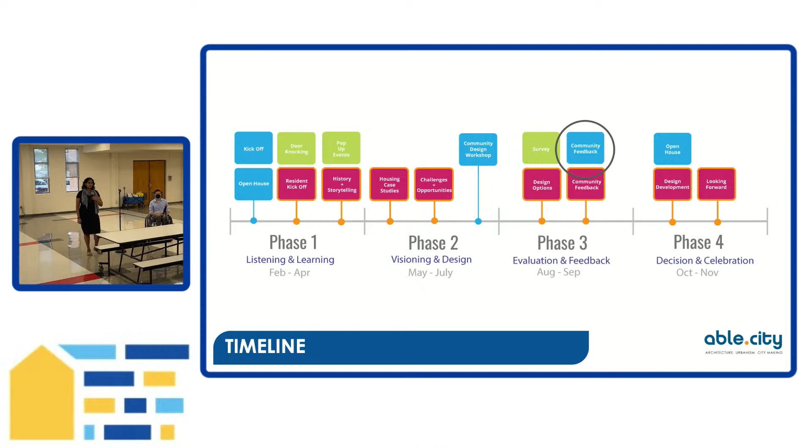So here's a little bit of the timeline of where we've been. We started this process in February, with a lot of learning and listening. We went out to community events, went door to door at Alazan, hosted a series of resident and community committee meetings, really just to understand what the community wants, what the residents want, what are the issues, what are the needs, what are the best ways to engage folks. And then we moved into design and visioning.

So we started to think about, well, what are the priorities? What should this master plan be defined by? And then we took a little bit of a break over the summer and came up with some initial proposals. So now we're in that evaluation and feedback phase.

So we're going to ask you all to take a look at the proposals. We have some questions about the master plan that we need your feedback on. Then we'll move into the final master plan version, and in phase 4, come to that final decision and hopefully celebrate together that we've come to an end result we're all happy with, and that you're excited about how we're going to move the master plan into the future.

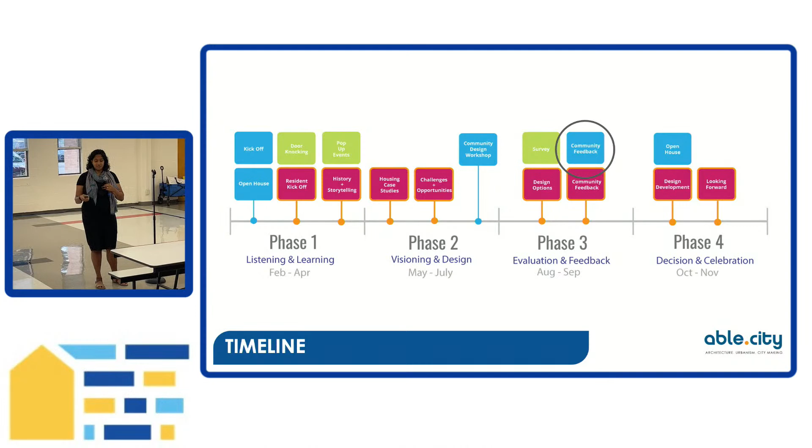Instead of other schemes, other past projects considered the possibility of mixing incomes, changing the rents at which people could live here. That was scrapped, and we're really focusing on maintaining Alazan as public housing, so that the income mix and the rental rates will stay the same. It will serve the same population as Alazan Courts serves today.

Another commitment was that we're going to retain at least 501 units. So Alazan is going to serve the same number of people as it does today, and all of those 501 units will stay public housing. The third commitment is that there's going to be no displacement from the neighborhood.

Over time, when we get into construction, there's probably going to be a need for people to be temporarily relocated, whether we're doing new construction or rehabilitation of existing buildings. People most likely won't be able to live through that in their units, but we're going to work out a phasing system so people can be relocated to other Opportunity Home units and homes on the near west side. It won't be dispersed across the city, but focused on a phasing plan where people can stay in their community, and then be invited back once the new project is complete.

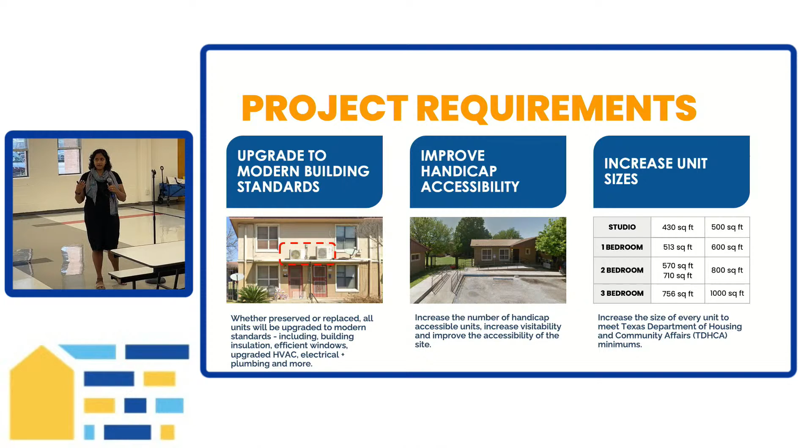And then the other thing we need to do is increase the unit sizes. Currently, the units are about 30% smaller than is typical today. So it's another regulation that we need to upgrade and increase the unit sizes, so that a 430 square foot studio needs to turn into a 500 square foot studio. So that's something that's going to shape the design development. It will shape how we can reuse existing buildings and what we need to do building new buildings.

Some of the design challenges: one is the floodplain. We're right up against Alazan Creek. With climate change and changing development patterns throughout the city, FEMA, the Federal Emergency Management Agency, is currently redrawing their maps, and that line of where the 100-year floodplain is will move. Currently, under all of the existing regulations, we're not allowed to build or do any substantial renovation within that area. So we need to plan for potentially the buildings that exist in that area most likely getting demolished, and we'll have to shift those units elsewhere in Alazan Courts.

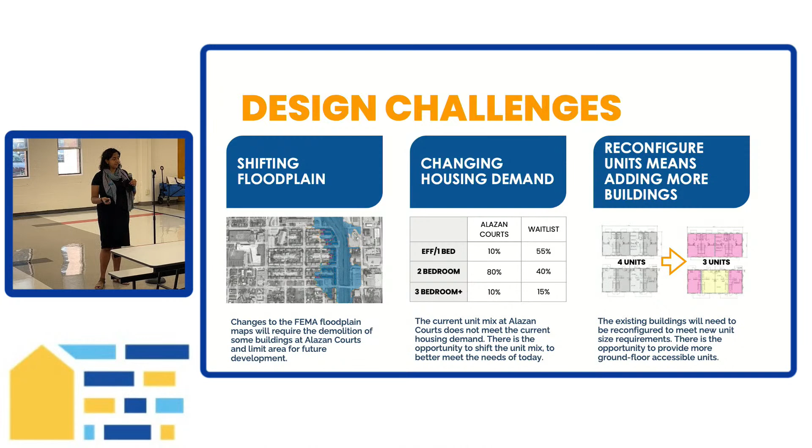So to dig into a little bit of that question of housing need - and I apologize if this is a little small, I can explain in more detail. Currently at Alazan Courts, there is a majority of 2-bedroom units; 82% of the units at Alazan Courts are 2 bedrooms, and that really defines the character of the neighborhood. It's a lot of smaller families, there are a lot of young kids at Alazan Courts, and that's really defined by the fact that the unit size, there's not a lot of those smaller units, there's not a lot of the bigger units, and so Alazan Courts is defined by that today.

And then you can see in the second graph, that pink bar is Opportunity Homes' wait list. Currently there's a high demand for those smaller units, and there's also a greater demand for 3-bedroom units and 4 or 5-bedroom units. So initially, when we started the design, we needed to find a starting place, and we said, why don't we try to find a balance between what Alazan Courts has today and what the need is in the city, so that we're responding to the current needs and not what the needs were in 1939. So for the starting point for our design options, we decided to move forward with increasing the number of 1-bedrooms, decreasing the number of 2-bedrooms, and kind of keeping the 3 bedrooms the same. In our initial feedback from last week, when we met with our committees, I think there was concern about that.

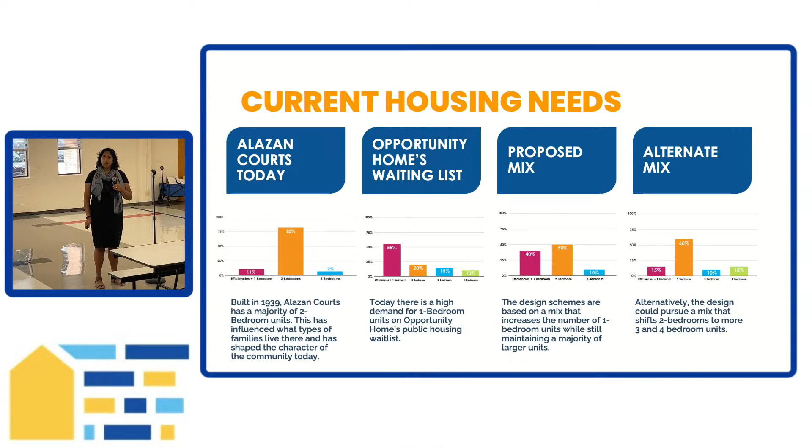So those are kind of the overarching things we're thinking about with the design. Thinking about those things, we started looking at the actual buildings, looking at the site. We had a goal of developing 4 different design options. So when thinking about that design, we needed to solve for this kind of challenge.

We had those 501 units. There's some units that are in the floodplain, so we need to accommodate for the fact that we're going to need to relocate those units. And then the units we had to reconfigure and make bigger, we lost some units there.

So of those 501 units of the existing Alazan Courts, in the future those buildings could accommodate 337 new units. Those new units are bigger and they're not in the floodplain. So of the existing buildings that we have, that's how many units we'd be able to maintain.

So that means to get back to that 501 number, we would need to add back 240 units. This was something that the folks who were here at the last meeting on June 25th played with in the Lego exercise.

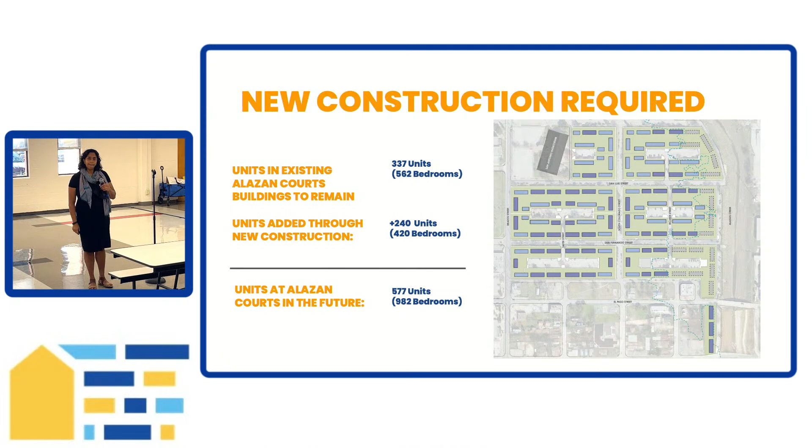Graciela: So you talked about 501 units and now it's 337 — so the difference is all of those that are in the floodplain? Speaker: The difference is the units that are in the floodplain, and the units we lost because we reconfigured.

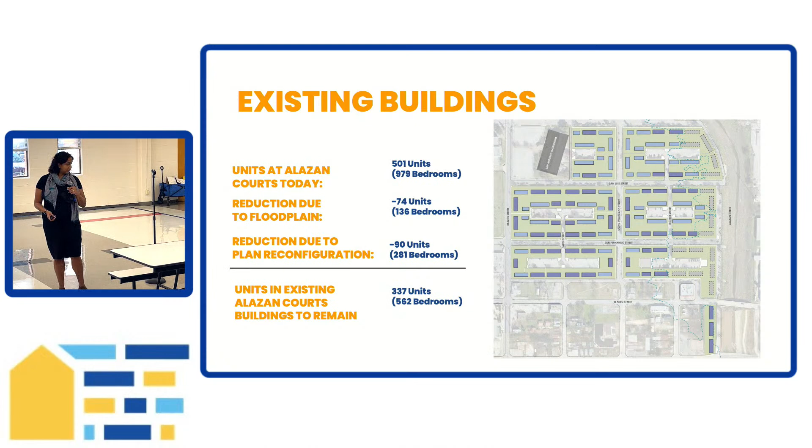So in the last one, we lost 74 units because of the floodplain, and then we lost 90 units because we had to reconfigure and make the units in the existing buildings bigger. But then the next question is — let's go to the next slide.

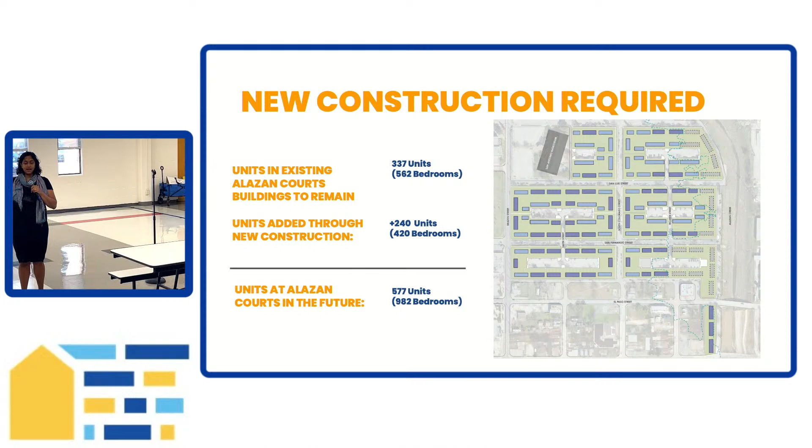So now we're going from 562 bedrooms to 982? Almost doubling? Yeah, so 501 units at Alazan Courts today has 979 bedrooms. We said in the final design, we want to make sure that there are 979 bedrooms.

At the mix that we used for the design options, we would need 577 units to achieve that. If we decide on a different mix, with more 3-bedrooms, more 4-bedrooms, we wouldn't need as many units because we would still be matching what's there today. So it's all this complicated puzzle of everything shifting up and down.

So none of those things are set in stone, and we really need your feedback to determine what the best solution is. Did I lose anyone on that? Are there any questions? We will get into small group discussions and can dig into some of these concepts in a little more detail.

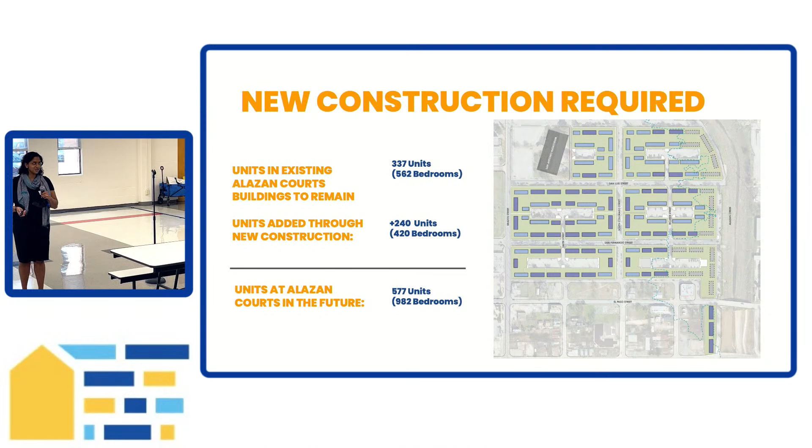Can I just add a comment on that? Mm-hmm. So even if the mix...

I'll let you pull it out. That is hard. Hello? Turn it on.

So even if the mix changes, even drastically, the problem of we've got to find more land for these units that we're losing is still in play, and it's still significant. So if we build a bunch of 4-bedrooms, this number is going to decrease by some percentage, but it's not enough for us not to have this design problem to achieve today. So that's where we're just starting from that number, but it's still the same exercise. It's still very valuable to us.

Go ahead. No, oh, sorry. Yeah, sure. I think there's also a question from Leticia. So on the point of relocation assistance.

When this project happens, the date that you're going to begin the project, you stated you're going to give the residents vouchers for relocation assistance. I have two questions. What accountability will the Opportunity Home case handlers have to make sure that these vouchers are designated for Alazan residents, or are they going to be utilized by other agencies like NHSD or other agencies in San Antonio to help with Opportunity Home relocation on other units? That's my one question. But also, what are you going to do when you give these vouchers to the Alazan residents? Because currently, anyone anywhere on Opportunity Home vouchers cannot find another place to go. I do work for a nonprofit agency in evictions, and it's a struggle to try to find relocation housing with a voucher. So are you taking that into consideration? And what are you going to do when they cannot find housing by the deadline when you start your project?

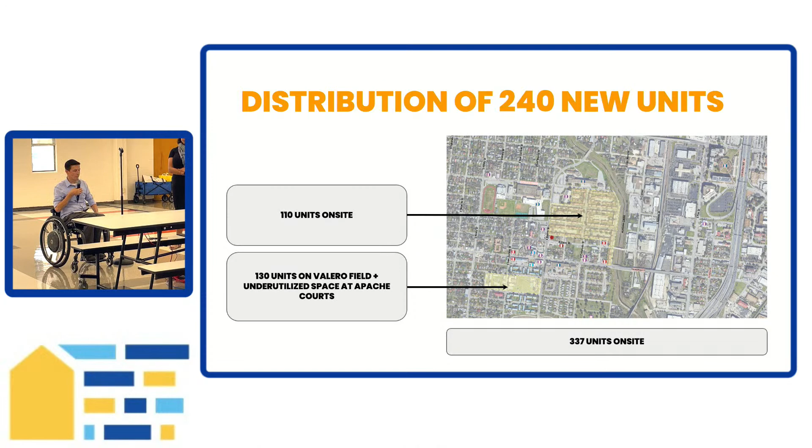So if we were to add proposed housing on the Apache baseball field, and we were to put all 240 units there, it would be a massive housing structure, and we don't want to do that. We want to do something that's sensitive to the local context and neighborhood, and sensitive to the existing housing that's at Apache Courts. So we can fit 130 units there by doing 2-story buildings in the same scale of the existing Apache buildings along the street, and infilling the existing baseball field area with some 3-story buildings tucked back behind those buildings with additional green space in order to get 130 units there.

We can definitely look at shifting that number down and around. That's one of the survey questions - how tall can those buildings at Apache be? If they need to be all 2-story, then we can certainly take that input and feedback and shift this scheme to be in response to that. But it begins to shift the numbers around again. If we go down to 2 stories there, then we have to look at where that additional number of units will have to go. So this was just our first iteration at trying to fit those units onto Apache to create some new housing there as we go through that first phase of the project.

Coming out of the committee meetings and the last community workshop, we started by looking at the different ways we'd gotten feedback about how to distribute green space back into Alazan and how to add units back into Alazan. There were a lot of ideas about putting new homes on the interiors of each block, along Brazos Street, or even along the existing floodplain line, hugging that line and adding additional homes there.

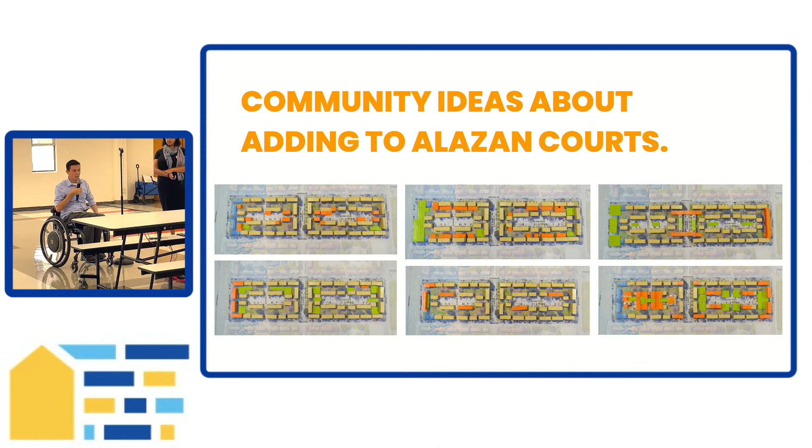This first scheme we call Maintain the Streets, because it tries its hardest to preserve the existing feel and neighborhood by keeping all the existing street-facing buildings. From an urban design standpoint, it's that front porch to street condition that really provides the existing look and feel of the Alazan neighborhood. So in this scheme we've tried to keep all the existing 2-story buildings that face the street, and we're only adding new construction to the interiors of the blocks within the footprint of the existing 1-story buildings.

By taking those buildings taller, we're able to get in some additional units and get us closer to the 110 units we need to put back into Alazan. By maintaining the streets, we're also able to distribute additional green spaces within the interiors of the blocks themselves. Then in each scheme, this purple box represents a placeholder for some form of community hub - an element that helps anchor additional green space along a park near the creek.

So in this scheme, even though we're only doing additional construction on the interiors of the blocks, in order to get back to 110 units, which is the goal, we had to add some additional height. In this scheme, we had to get to 3 stories.

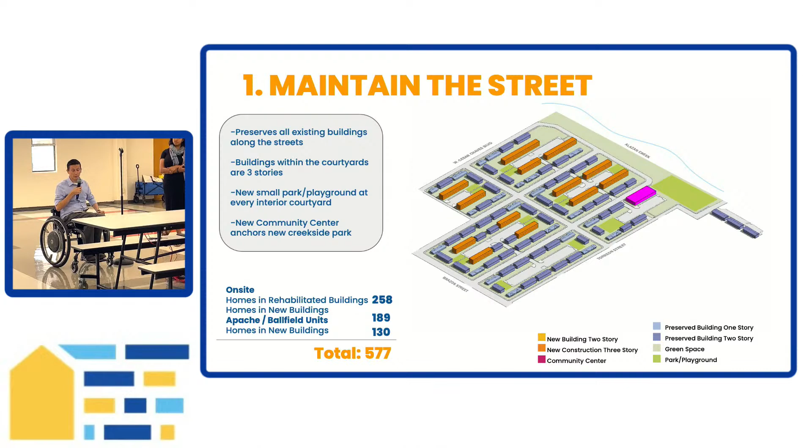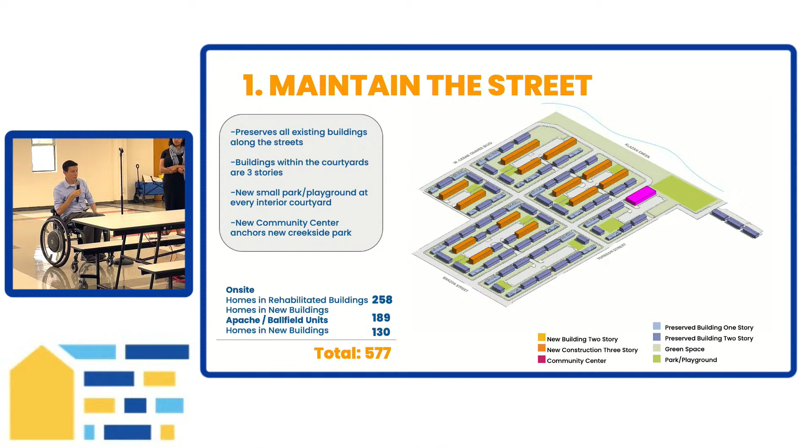I know we heard a lot of comments in the last community workshop that within the neighborhood plan, construction over 2 stories is not within that plan. So we wanted to be very sensitive with where and how we add any additional building height. We've already begun doing sightline studies of how those 3-story buildings would look and feel from the street. In this scheme, given that those 3-story buildings are added into the footprint of the existing 1-story buildings, they're set far enough back from the street and shielded by the existing 2-story buildings that you really don't see them or feel them from the street.

We've heard some comments and gotten feedback about additional view corridors at Alazan - from streets to downtown and from the courts to the creek. We can continue to look at those sightline studies if those questions arise, as we begin to look at any place where we might have to add additional building height.

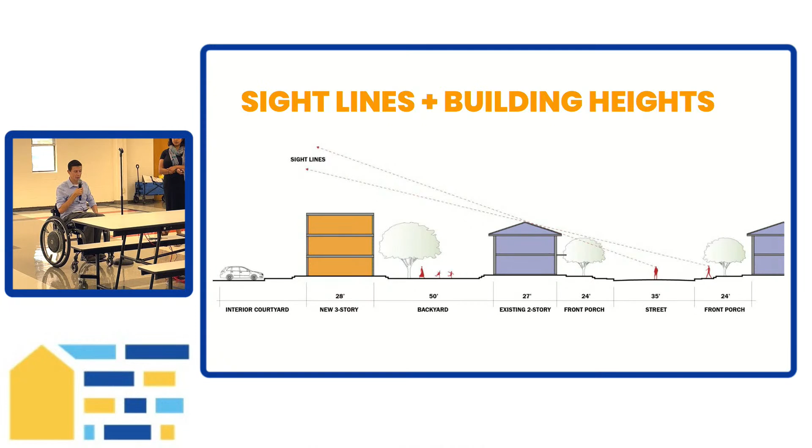In the second scheme, which we call Preserve the Core, we asked: what if we only did new construction at the edges? What if we only put new buildings along Brazos or along the creek itself, hugging that existing floodplain line? If we did that, we could preserve all the existing buildings within what we call the core of the neighborhood - along the streets and within the interior of the courts - while maintaining a 2-story building height along Brazos.

In this scheme, we're also showing the community element tucked under on the 1st story there along Brazos. That puts it in a really accessible and visible location.

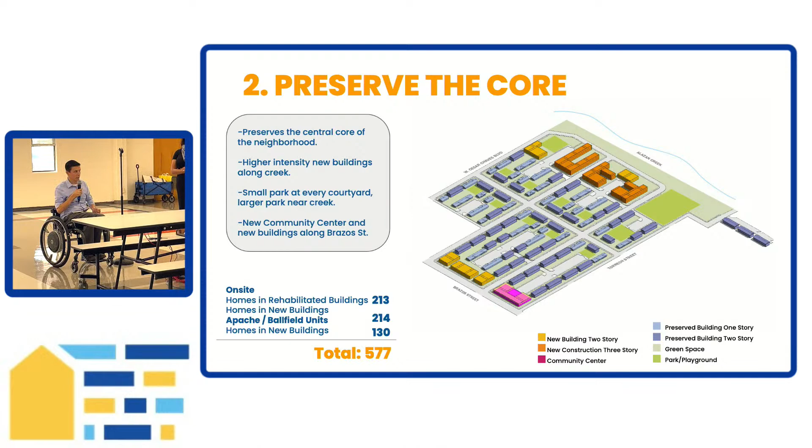By not touching the core of the courts itself, we're able to distribute a wider variety of activated green spaces into the corners of the existing blocks. In this scheme, because we're only touching the edges, to get back to 110 units, we had to go to 3 stories somewhere. We decided to push that back along the creek, tucking it away from neighborhood views and farther toward the creek. We're also anchoring a neighborhood scale park space back along the existing creek, where we're losing some units to the floodplain.

So we had scheme 1, where we looked at new construction on the interior of the blocks but had to go to 3 stories, and scheme 2, where we looked at building on the edges but again had to go to 3 stories. We really wanted to respond to that comment about building height and maintaining a 2-story building so we can help keep that neighborhood character.

So we said, what if we combine those 2 schemes in some ways, doing a little editing on the streets and near the creek, but also adding some buildings onto the interiors of the courts. By doing a bit of both schemes, we were able to bring the building height back down to 2 stories. In addition, by adding a few extra buildings, we were actually able to respond to one of the community values of adding additional public housing units. In this scheme, we get 23 additional housing units.

In this scheme, you can see how we've incorporated that community hub back toward the creek along a smaller scale neighborhood park, with additional green spaces distributed throughout the remaining blocks. The other positive of this scheme is we're able to maintain as many of the street-facing buildings as possible.

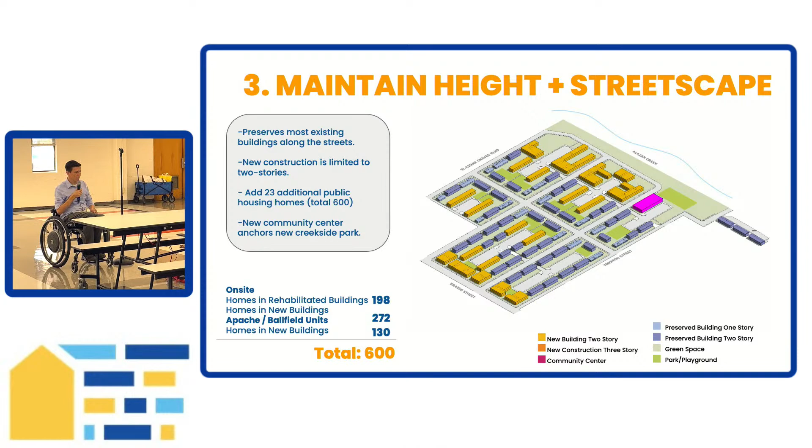In this last scheme, we really wanted to respond to one of the bigger community feedback elements we've heard: the need for more green space, a desire for places for people to spend time with their kids and families outside. This really rethinks the space along the creek and floodplain, looking at how we can incorporate as much new green space as possible. By doing some taller buildings along just Brazos, and some taller buildings within the interiors of the courts while rotating those buildings around, we were able to create a larger scale green space court within each block. Then, by pulling the buildings away from the creek itself, we could turn that into a neighborhood size park space anchored by a community hub.

So there you can see how those buildings along Brazos are a little taller, and the buildings in the interiors of the courts are a little taller too, but the benefit is that we can incorporate much bigger scale green spaces.

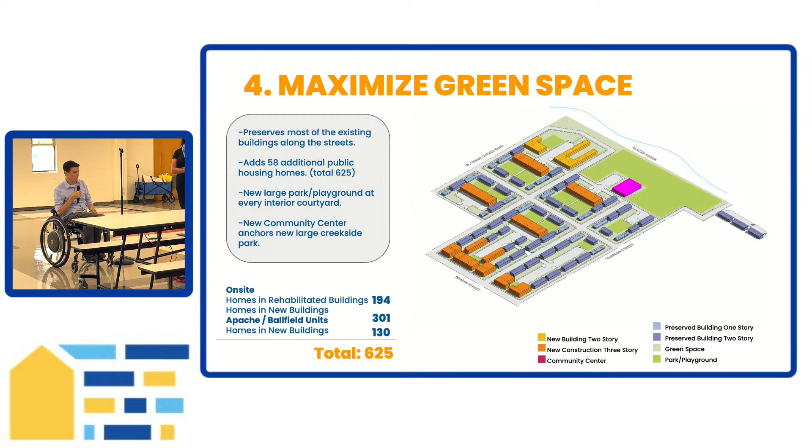The other opportunity for us to find a bit of a relief valve in terms of the number of units we may have to add back to the courts is finding additional land within the neighborhood itself, additional parcels we could potentially add units to. That would reduce both the number of units we'd have to add to either the baseball field or incorporate back into Alazan itself.